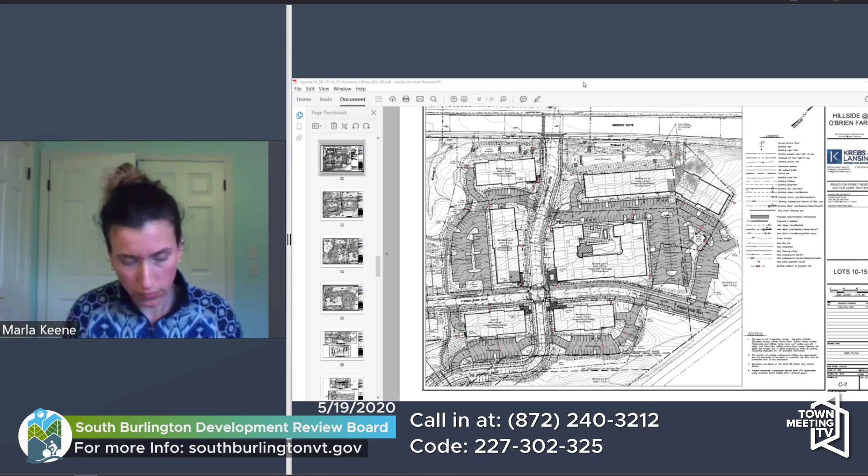Okay, so if we correct that previous graph that dictates what each of the stories are of each building, then it should align with that exhibit, correct? Yes. Andrew?

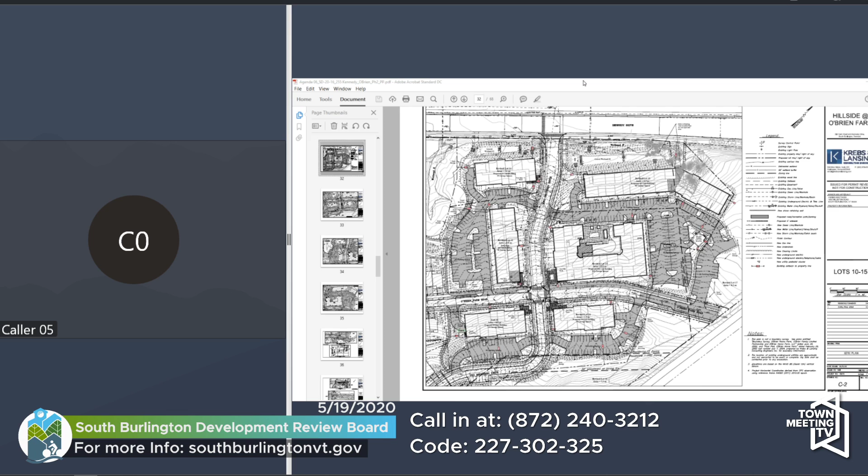Yeah, and I think the issue is that the master plan provided a setback waiver for buildings of 5 stories. And so if these are 5 stories, they would already have a 6-foot, I think, front setback. And so some waivers wouldn't be necessary, depending on which one is the front. It's just a problem that we have to figure out.

So I think that we've got that. I think the question that the board should keep in mind would be to just look at the site plan and, in general, does the way that it's set up seem appropriate? And that would be sort of the feedback that we'd be looking for.

Another reminder of our discussion held 4 years ago regarding the master plan, regarding staff comment number 8. Staff recommends the board review whether the applicant is compensated for the requested height waiver by providing high quality, varied, and complementary architecture for all buildings and landscaping, to determine whether they will preliminarily grant the applicant's request for height waivers. Maximum height is 35 feet for flat roofs.

In the R12 district, the applicant is asking for building heights between 52 and 69 feet above average pre-construction grade. And I do remember this discussion that happened during the master plan, and how this works only if you can build up and not out.

But I also remember us stipulating, Mark, do I have this right, John, that we wanted to make sure we were putting up buildings that were appealing, not just tall buildings. I think that's where this comment comes from, if I recall.

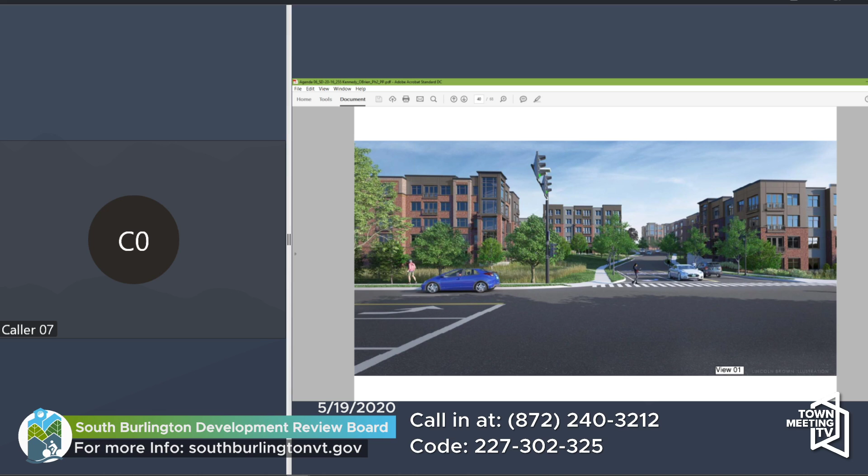We think the flat roofs actually work well here, considering its location. It's a prominent building on a fairly heavily trafficked commuter thoroughfare, so it's a little different than if it were tucked back into trees in a more suburban setting. These are also bigger buildings than Lancaster or Stonington Circle, so you're trying to find that appropriate mix. Thank you, Evan. No problem.

Okay, moving on to staff comment number 9. This is talking about inclusionary -- Paul's not on, but Marla or Delilah can correct me. As I'm learning, we've got an inclusionary housing ordinance that's pending. It's been warned and will likely be adopted, but it's not officially adopted yet. The city council, I believe, extended or continued it last night.

But we have an inclusionary housing ordinance that will likely be adopted, that this project is attempting to comply with, with the goal of providing more affordable housing for the city of South Burlington. So that's the short background. Sandy or John with the Affordable Housing Committee could give a lot better explanation than I can, but that's the background for staff comment number 9.

Staff recommends the board require the applicant to provide 3 additional inclusionary units. If the applicant adds 3 inclusionary units, they may add up to 51 offset units, which would make their proposed 390 units allowable without amending the master plan. There's a lot of math here in the preceding paragraph. First, ask the applicant: do you agree with the staff's math here?

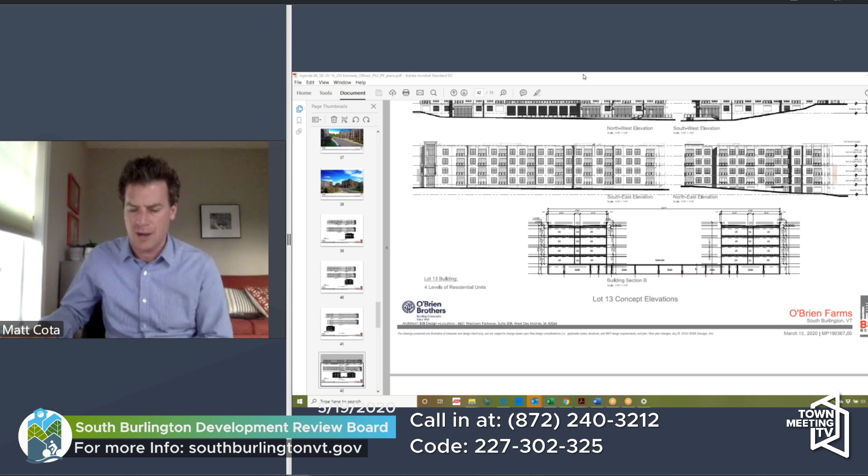Staff comment number 12: the applicant has received preliminary water allocation and has provided an estimate of wastewater flows. Staff recommends the board require the applicant to apply for and obtain preliminary wastewater allocation prior to applying for final plat. Is that agreed, understood? That's no problem. Yep, okay.

Staff comment number 13: staff recommends the board require the applicant to incorporate the comments of South Burlington Water Department into their plans at final plat. I can speak to that, this is Scott Homsted. Typically what I would do is, after this meeting, set up a meeting with South Burlington Water District and basically do exactly what they want. These comments are easy and much easier to hash out in a 15-minute meeting than to do a lot of back and forth. I'm not concerned about it at all. Okay, thank you for that, Scott.

Staff comment number 14 regarding circulation. Since phase 2 trips are now projected to be so much lower than estimated in 2016, staff recommends the board require the applicant to evaluate whether the proposed intersection geometry is still important. Maybe a brief discussion on why we're expecting fewer trips, Marla or Evan, whoever.

Yeah, the change there I think is driven by the fact that in the original master plan we had included the full amount of residential density units as well as up to 45,000 square feet of commercial, because at that point we weren't fully locked in to a fleshed-out plan. With that 45,000 square feet of commercial, it drove those trip ends up. So Marla and staff are correct that the trip ends are reduced fairly significantly. When our engineer takes a look, my assumption is there's probably not going to be a big change to that intersection onto Kennedy as a result, but we'll certainly take a look at it.

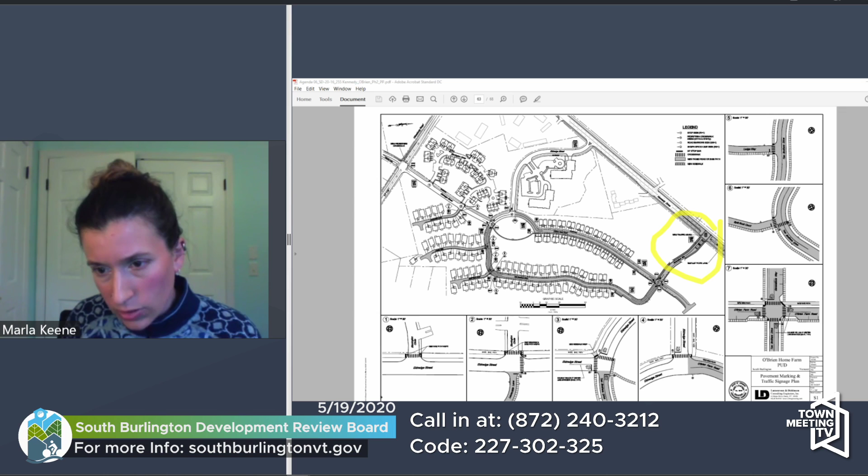Anyone can draw on this if they want to point something out. So we're looking down here, I'm going to try and circle it. This project has proposed an additional turn lane on Kennedy Drive, and then coming out from the project, a left and a right onto Kennedy Drive. So the question is, now that they've reduced the trips by almost half, is this geometry still the proposed geometry, or is something smaller more appropriate?

And you're welcome to, anyone can zoom in on what we're seeing on the screen as well. I'm sorry, this is Dawn, I stepped out to close some windows because it's getting chilly outside.

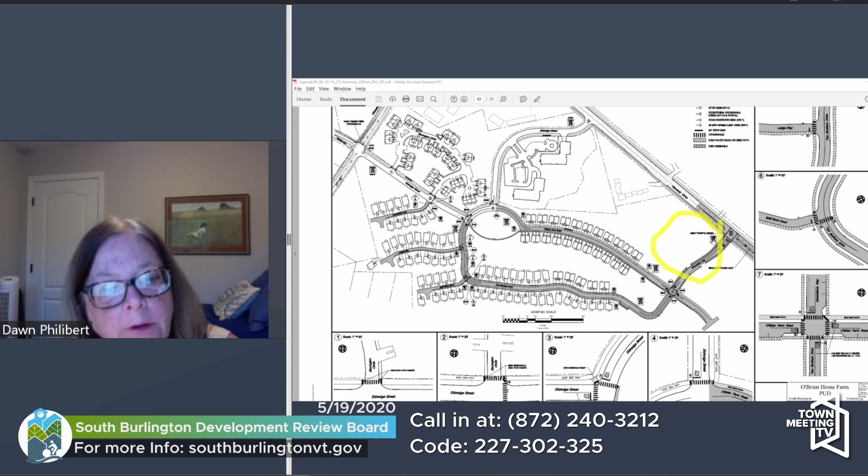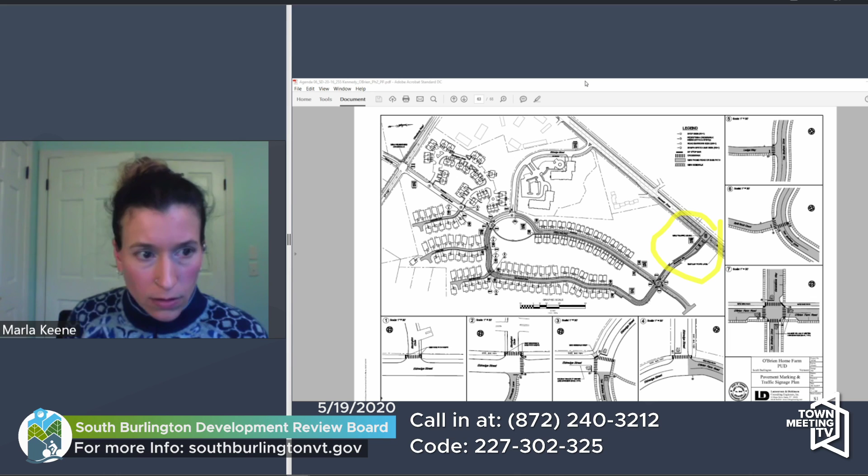Why do we have a theory on why the trips have been reduced? The trips have been reduced because the previous trip estimate included a large amount of commercial square footage, which is no longer proposed. And correct me if I'm wrong, Evan and Andrew, but at Sketch you said you weren't going to be doing that commercial. That's correct, there's no commercial. Once we increased the unit count, it took the space previously assigned to the commercial use. Right, so residential units generate significantly fewer trips than commercial space. Thank you for that explanation.

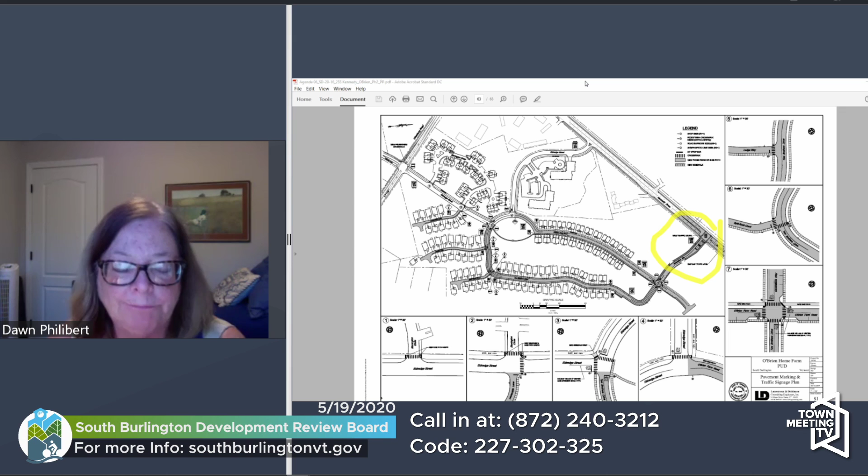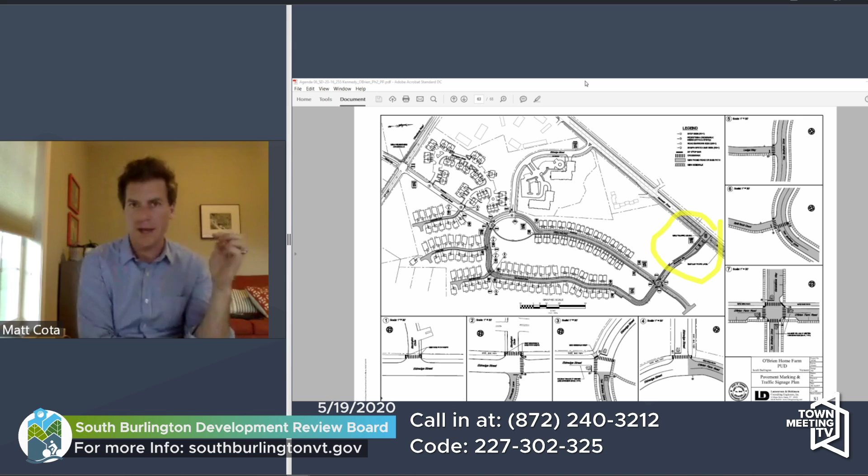Okay. I'm not a road engineer so I don't know if we still need it, but my inclination is to say... So we'll look at that with our traffic engineer who did the original study and get a recommendation, also keeping in mind the context of the plan we're pursuing on the other end of the site and the future potential of the intersection. I'll get a letter or some memo from him, hopefully prior to the next meeting on the 16th or 19th, whatever the day was.

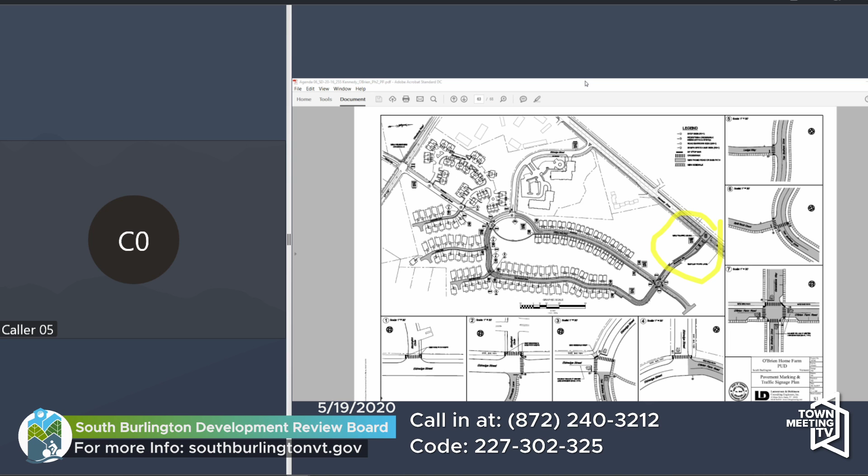Okay, thank you Andrew. Item number 15: at this more formal stage of review, staff recommends the board require the applicant to remove the head-in parking. This is on Two Brothers Drive, and if the applicant desires, replace it with parallel parking spaces. I'm zooming in here on Marla's map.

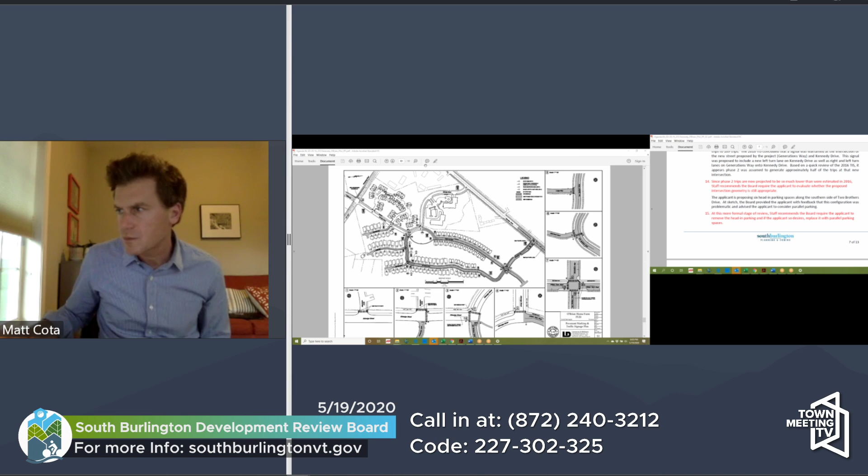Can someone circle where we're talking about? Delilah, can you go to a plan that shows the project? Are you in the plans PDF or in the overall? I can help you find the right page if you tell me which PDF you're in. She's in the overall.

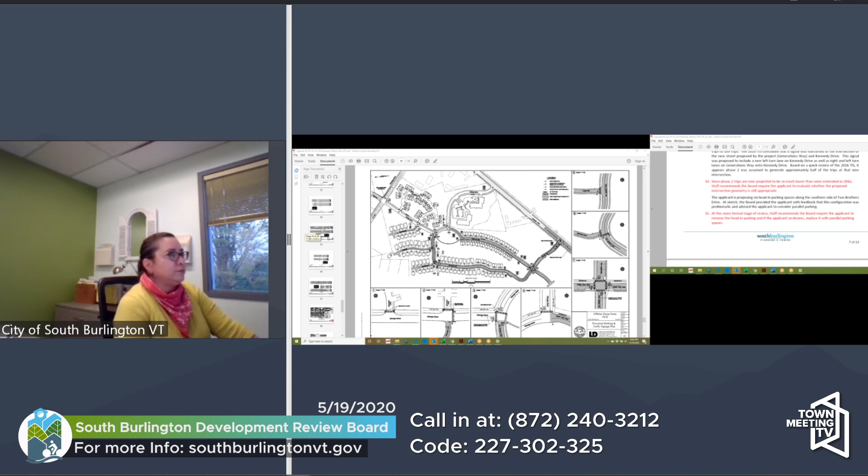Which page would have what you need, Marla? I've got them both open now. Can you see both my screens? No, but it's okay. Are you in the one with the staff comments and the plans, or just the plans? I'm in the one with staff comments and plans, with staff comments on the left and plans on the right. Okay, so go to plan page 31.

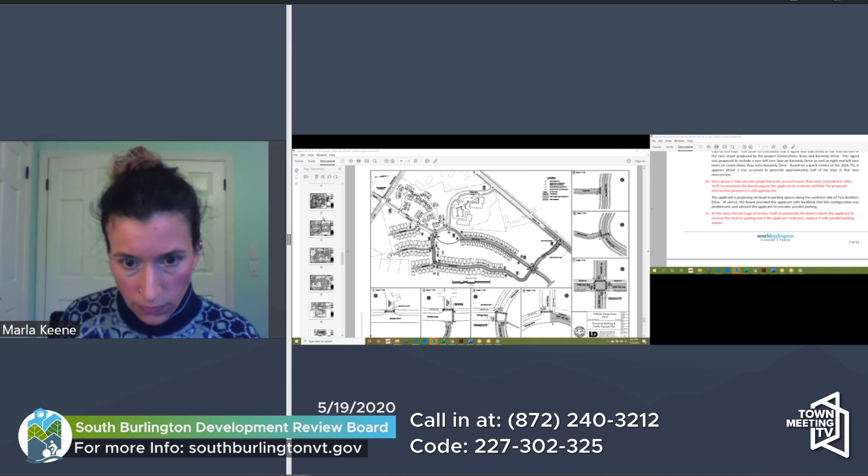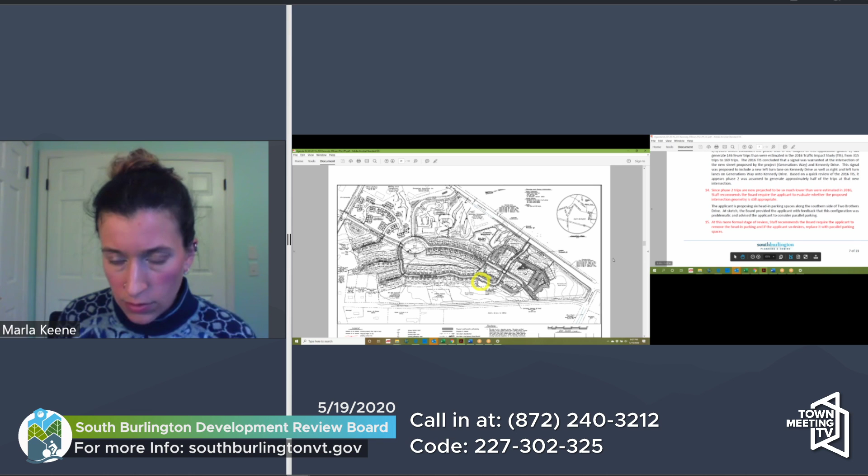So these guys, you want to zoom into those? I'll zoom into there, hold on. It's going to move your drawing, but I'll erase that.

So with regard to those parking spaces, our understanding is those spaces are fully approved in the existing Hillside final plat. They're currently soon to be under construction, as that section of road is likely under construction this year. When we had our sketch plan hearing a while ago, we had put a club building at the top of the hill, right above lot 10 and lot 11, and had increased that 6 spaces to become like 17 spaces. The spaces rounded the corner, and there was concern that it was a safety hazard and didn't work with the grading. There were all kinds of problems. All of those additional spaces have been removed.

So I'm just to the 6 spaces I believe are part of the current plan. I'm not sure that this permit proceeding will be done in time to change those, and they're probably going to be built this summer, so I'm not sure there's much we can do on these.

Is that right, Marla? Are those parking spaces part of a previously approved plan? Not that I'm aware of, but I'm not calling Kevin or Andrew a liar. I'm just saying it's not something I had been made aware of before. A lot of this project proceeded before my time. That may be the case.

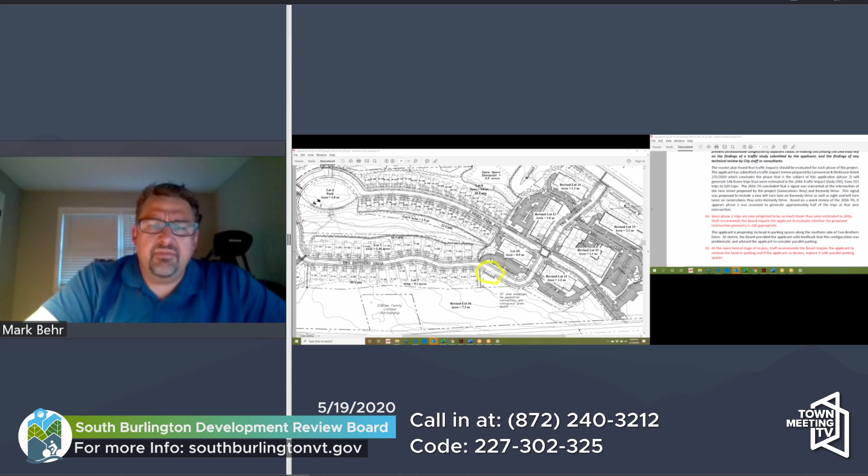Correct. So when we had our sketch plan hearing for this preliminary plat for these 6 commercial lots, we were looking at expanding the master plan to put the clubhouse at the top of the hill. We've since pulled that aspect of the project out after the sketch plan. So the spaces have always been there, they're part of the Hillside final plat.

The conversation with the board was, what if somebody who lives at lot 771 has a small gathering and has extra people, where do their guests park? Guest parking predominantly is along Eldridge Street in this neighborhood. There's 100 spots on Eldridge Street, but we wanted a few spots nearer to the folks on the far end of Two Brothers Drive, so that if they had a couple extra cars, they weren't double parked in the road. That's where those 6 spaces came from and why they're in the plan. We had expanded it when we were looking to put a club up there, but we've since pulled that back, and the spaces shown, I believe, are just existing approved spaces.

Is the concern, Marla, that the cars will be backing out, a safety aspect, or that we just don't need that much space or parking? Purely safety. We generally don't have head-in parking on roads. Yeah, you're going to back out there, and I don't know what the speed limit is, 15 miles an hour.

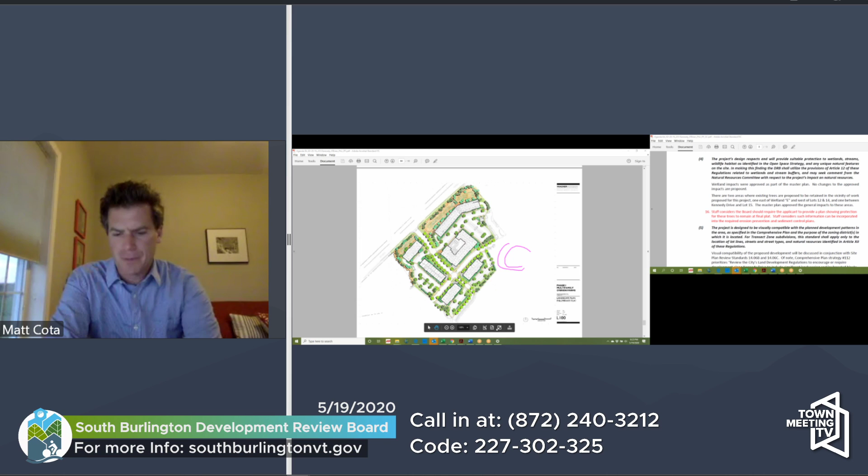Yeah, Matt, can I just make one comment? I think this is an important issue, especially with this plan on the screen, because you're looking at 4 to 5 story apartment buildings, and there's not a lot of green space. It's basically parking lot, then the islands for the parking lot and street trees. I don't see a lot of opportunity for little pocket parks and benches and any kind of recreation space.

I know we're talking about the stormwater area between the development and Kennedy Drive, but I think we need to see how that's actually going to be utilized as a public usage space.

Okay, thanks, Mark. I think if there's no other comments about green space and open space... This is Dawn, I have a comment. Yes, please, Dawn. Did you, Andrew and Evan, did you develop Lancaster?

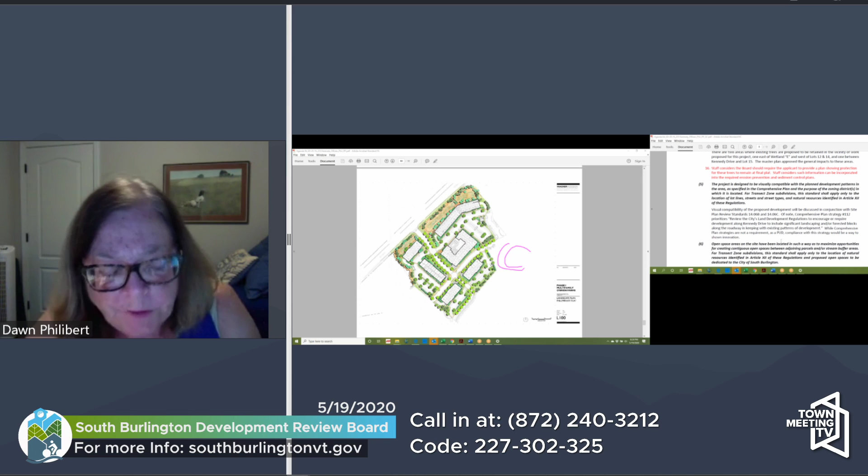Was that an O'Brien property? It was an O'Brien property to begin with, that was permitted and then sold to another builder.

Because I drive by it all the time, and there's a lot of trees, and benches scattered, and I'm stunned by how occupied those benches are. At one point I thought they might be blow-up dummies, like you see in the city in the express lanes or something, because there are always people sitting, and then other people bring their chairs around, and I think that's wonderful. So if there's any way of incorporating that kind of concept, I think that would be great.

Thank you, Dawn. Yeah, no, I think we like that idea. I think we can fit some things in, and I think we will, and we'll show you guys where they're going. And I think, Matt, to your point, it is an adjacent master plan that has that open space, but this master plan that was approved with these lots also has significant open space that's not on the screen currently. So perhaps getting some perspective in terms of the whole development and the open spaces that are available.

As Evan mentioned, there's a large open space immediately down the page of the three buildings. Mark, I don't know if you were misunderstanding what I was referring to, but I wasn't referring to the space in between building or lot 15 and Kennedy. It's that large area to the south that's right now just shown as white.

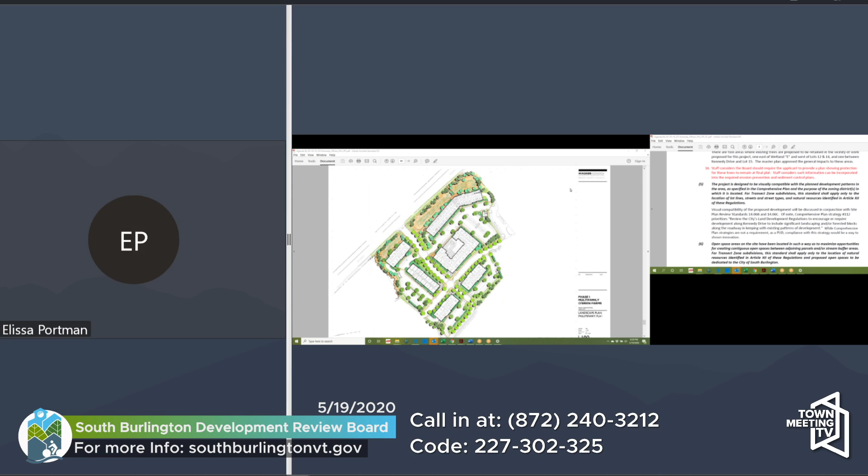So with that, I move that we continue SD 2016 to July 7th. Second, seconded by Dawn. Roll call: Brian Sullivan, aye. Dawn Philibert, aye. Jim Langdon, aye. John Wilking, aye. Elissa Portman, aye. Mark Behr, aye. Matt Cota votes aye. This meeting is continued to July 7th. Thank you very much for those attending.

We'll now go to agenda item number 7. Is this ours as well? Don't go too far, Evan.

Agenda item number 7, continued master plan application MP 2001 of O'Brien Farm Road LLC to amend a previously approved master plan for a planned unit development to develop 39.16 acres with a maximum of 458 dwelling units and 45,000 square feet of office space. The amendment adds 0.6 acres to Zone 2A without changing the approvals or use for that zone, and removes 0.6 acres from Zone 7 at 255 Kennedy Drive.

Who is here for the applicant? Evan Langfeld. Andrew Gill. Evan, welcome back. Now, we continue this item from April 7th.

We didn't have any further questions. The applicant requested we continue this item to this hearing so that no amendment would be made prior to the initial review of SD 2016, the related preliminary plat application. Staff recommends the board ask the applicant whether they are comfortable closing this hearing, incorporating that feedback into their determination of whether to close this item at this time. So where are you guys at with this?

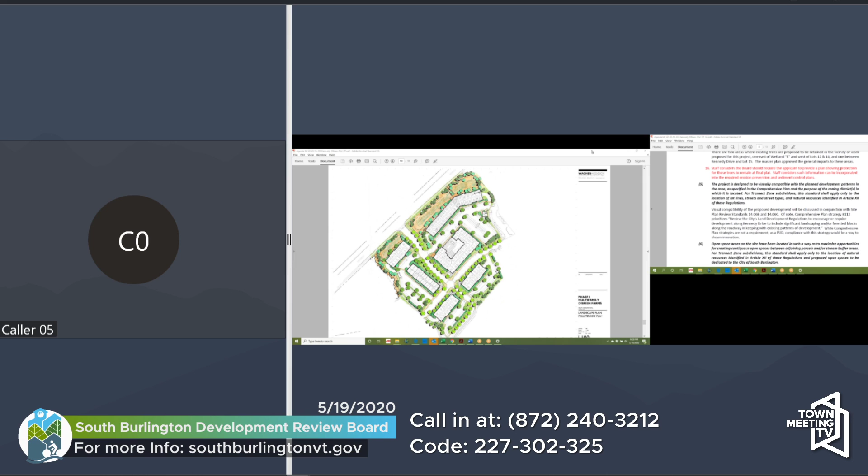I think that we would like to just continue this right along with the preliminary plat, if that works for you all. Okay, it'll create a little bit of a complication with the future phases, and it should just sort of progress simultaneously, if that works. All right, with that, I move that we continue MP 2001 of O'Brien Farm Road LLC to July 7th.

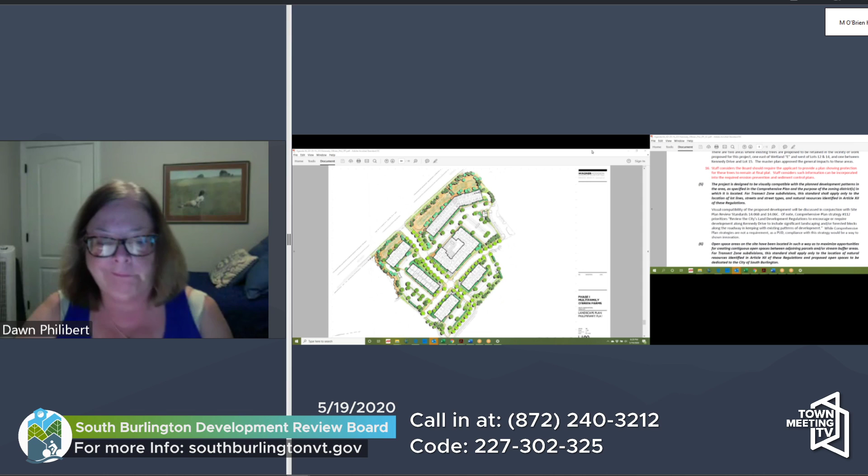Do I have a second? Second, John. Seconded by John Wilking. Roll call: Brian Sullivan, aye. Dawn Philibert, aye. Jim Langdon, aye. John Wilking, aye. Elissa Portman, aye. Mark Behr, aye. Matt Cota, chair, votes aye, and this item is continued until July 7th. Evan and Andrew, thank you very much. Have a good night.

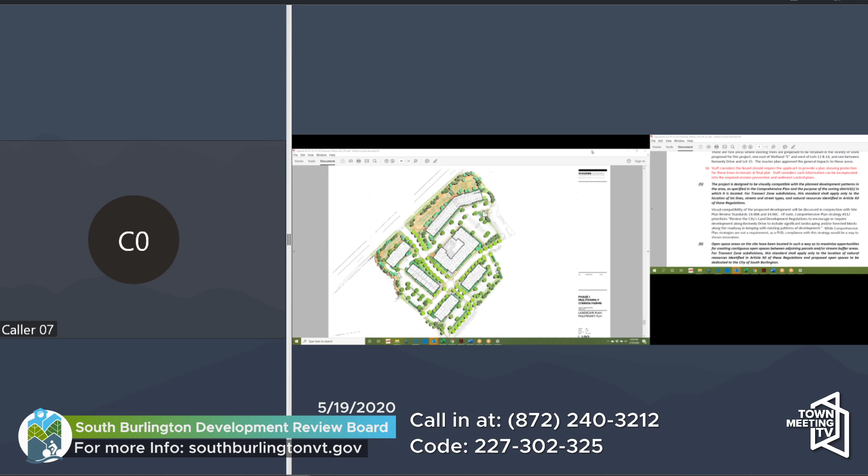We're going to open up the next three agenda items concurrently, if that is okay with staff and the applicant. We're going to open agenda item 8, 9, and 10: site plan application SP 20-020, site plan application SP 20-021, and miscellaneous application MS 20-03.

Who is here for the applicant? Hi, it's Robin Jeffers here for the applicant from SD Ireland and South Village Communities, and with me are Patrick O'Brien and Dave Marshall. So we got Dave and Patrick.

Great, and this is a site plan application, so I'd ask all three of you to raise your right hand and swear to tell the truth under penalty of perjury. I do, I do. Thank you. Robin, Patrick, David, I don't know who wants to take the lead, but here we are again. Tell us a little bit about why we're back here with this project and a little bit about the history, whoever would like to give a short synopsis.

We are back here with two lots, 4A and 4B, on Aiken Street. As you enter the development, coming up Allen Road East from Spear Street, you would take your immediate right. There are three houses, and then two vacant lots. This is actually our third time coming in for these lots for relatively the same buildings. We had a hard time during the recession financing these buildings, so our previous approvals ran out. Now we have more favorable lending and buying conditions, so we're back to get these reapproved. The last approval we gave to this was when? Was that in 2018, 2019?

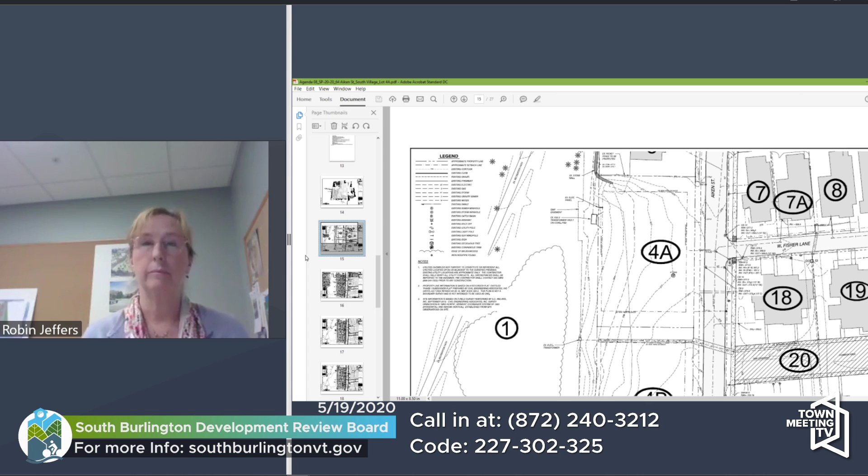So Robin? Yes, I think it would be helpful to send that to Marla, but also to the Planning Commission, because that's an important statement. I'm not sure what ability we have to waive that requirement based on Efficiency Vermont's recommendations if it's written into the LDRs, but please send that to Jessica or Mike Bittag at the Planning Commission as well.

We did send it to Marla, so she does have it. We also read that the statute says 'should' and not 'shall,' meaning you may allow the 22%. So we are requesting that.

Any board comment on having less glazing? Yeah, Matt, I can speak to that in detail. The 30% is a 'should,' not a 'shall,' and as a board, in past projects we've treated it as guidance, not a requirement. So if they're proposing 22%, there's really nothing saying we have to enforce the higher number. We've had discussions on at least one or two projects specifically about how it flies in the face of energy efficiency and Efficiency Vermont's standards regarding too many windows. Sometimes it's contradictory.

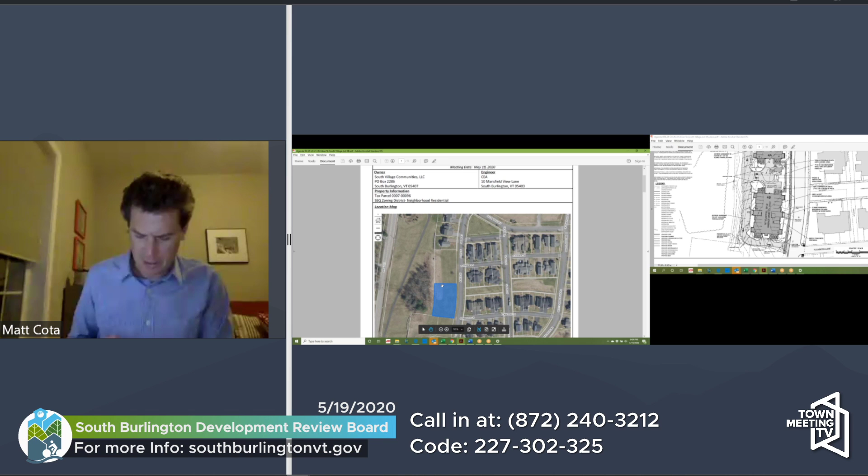With regard to the building just to the south of us here. Yes. A lot of the questions have already been answered, but I want to just review staff comments to make sure we've got coverage. Again, number one, dealing with coverage, same question as before, and I assume it's the same answer regarding 35%. Yep. Number two, since this project required a master plan to obtain individual site plan approval, staff assumes no water allocation was obtained. You will get that as a condition of approval.

And number three, staff recommends the board require the applicant to calculate how much translucent... We talked about that. Yes, that's fine. And then our landscaping math, which you are going to adjust for this project as you did for the other one, I assume, correct? Yes. Okay.

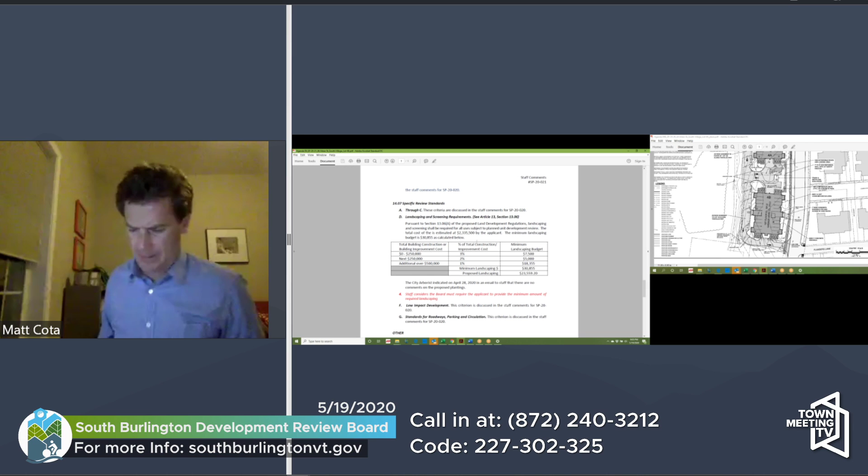We also opened up number 10, South Village Communities miscellaneous application.

Have you read the draft decision regarding the miscellaneous application MS 2003, Robin? We have read it and we accept it. Okay, you have any questions about it? No. Okay, thank you for that.

Are there any other questions from the board regarding this? Question. Go ahead, John. This is John.

So I read the comments that the neighbors and abutters submitted, and it sounded like they were surprised about the height of these buildings or the stories of these buildings. And I was thinking, well, maybe they're saying they wouldn't have bought their property if they thought the buildings were going to be this high. I don't understand it. So could you give me your interpretation of what their concerns are? And then I'd love to hear Marla's comments. Thank you.

Sure. We actually prepared a response to the Foster's letter. With your permission, I'll just read it. It's not terribly long. Go ahead. We are writing in response to the letter submitted by Brian Foster and the other signers. Skipping right to the key points, misled by developers, traffic safety, and the 3-story height.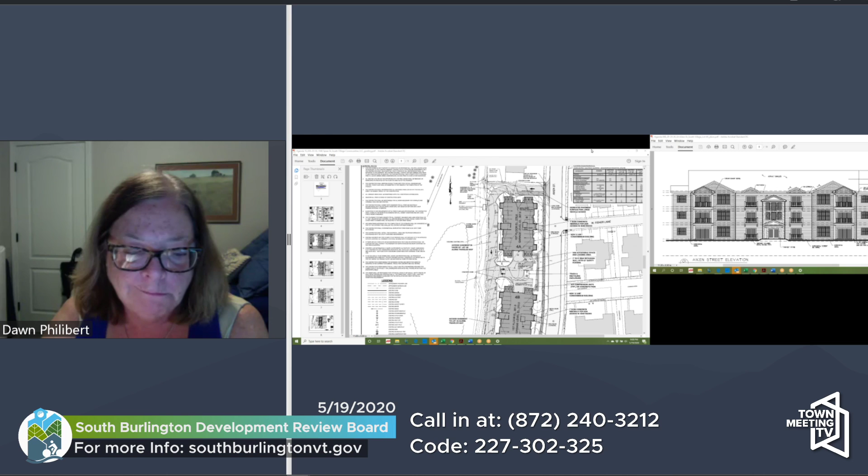I'm happy to forward the letter. Robin, did you submit your written response as part of that supplemental package you sent on Friday? I did not, we only prepared that today and didn't think I could send it today, but I can certainly send it. That'd be great. You've read it now, so it'd be great if the board could have it to read again at their leisure.

Sure. So before I ask the board, staff, or the applicant for any other comments, I will invite the public to comment. But I'll also say that we are going to continue this hearing because there's a couple of things we need before this ends, so this is not the last opportunity to comment if you've been listening. There's always an opportunity to write in the chat box, submit an email to Marla, and there'll be an additional opportunity to comment when this meeting is continued.

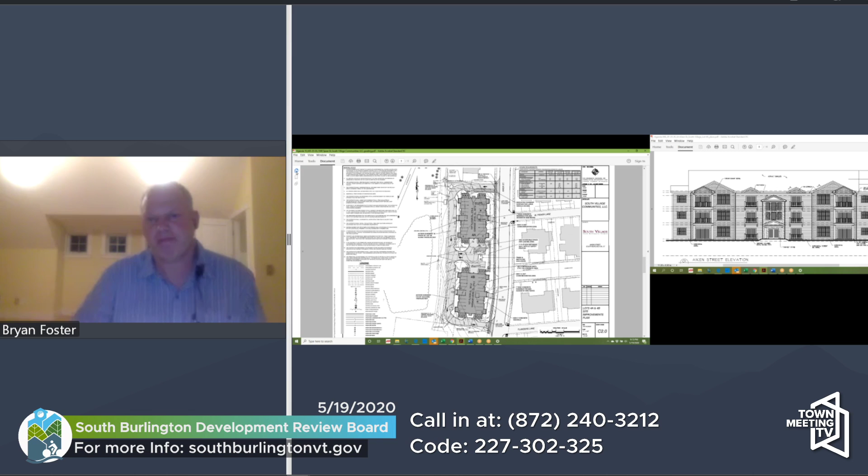May I comment? This is Robin. Those two lots, lot 5 and 5A, are single family. So there will be a single home on each one of the lots. There will not be any larger units. Thank you for that, Robin.

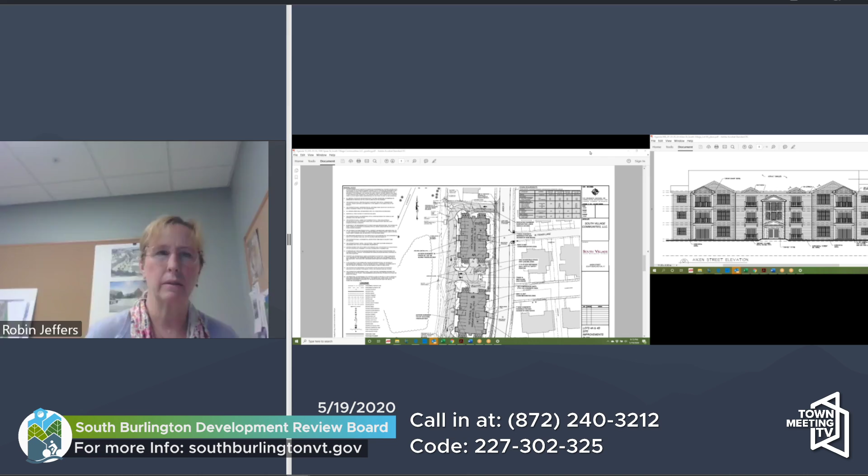If we zoom in... okay, all right, I see that. That helps, because we certainly don't want street parking, which there's already some issues about in the community. I don't know how many spaces there are, I do see the little division lines, but it's something. Okay, thank you, Brenda, and thank you, Robin, for that response.

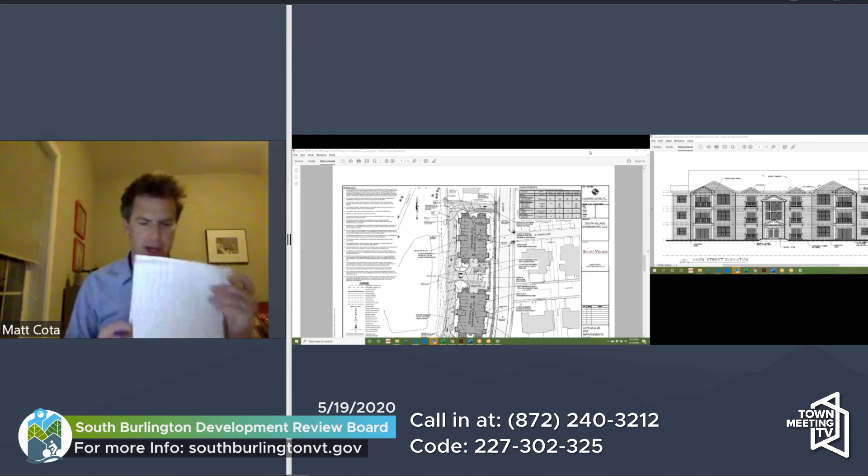If there's not, is there any other questions or comments? I would move - well, we've got a couple decisions to make. One is item number 10, miscellaneous application MS 2003, which we can close, and then item 8 and 9, which will continue to June 16th. Is that right, Marla? Do I have that correct?

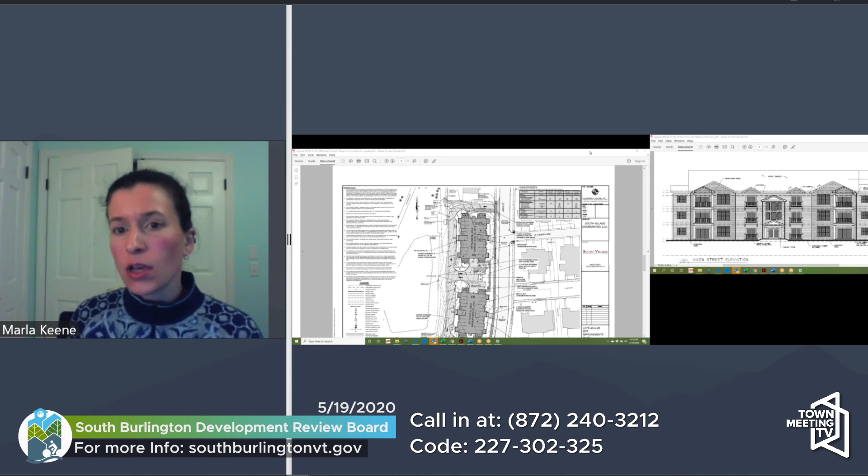Right, so similar to what we saw for O'Brien, this may be one of those situations where the board may want to just keep MS 2003 open until such time as the 2 Aiken Street applications are closed, because you don't want South Village to have to undo the miscellaneous if these 2 don't go forward. Though it's ready to go if you wanted to go that way. Fine with you, Robin? Yes.

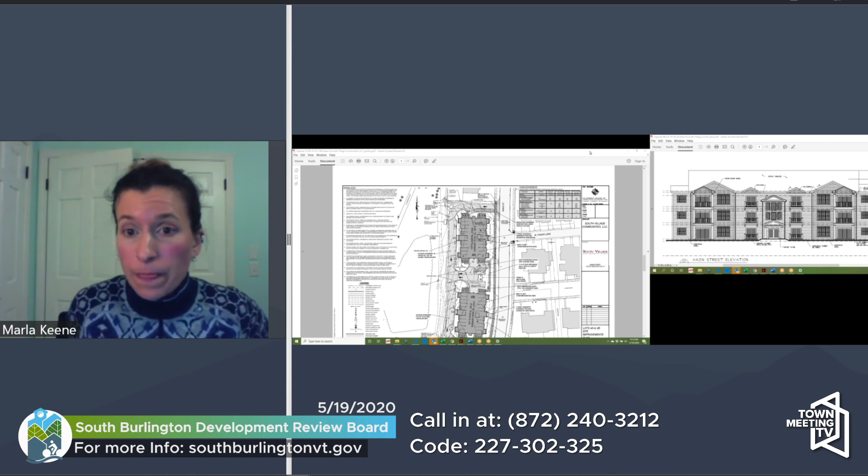Okay, so I move that we continue site plan application SB 2020, site plan application SB 2021, and miscellaneous application MS 2003, all three till June 16th. Do I have a second? I'll second. Seconded by Dawn. Okay, roll call.

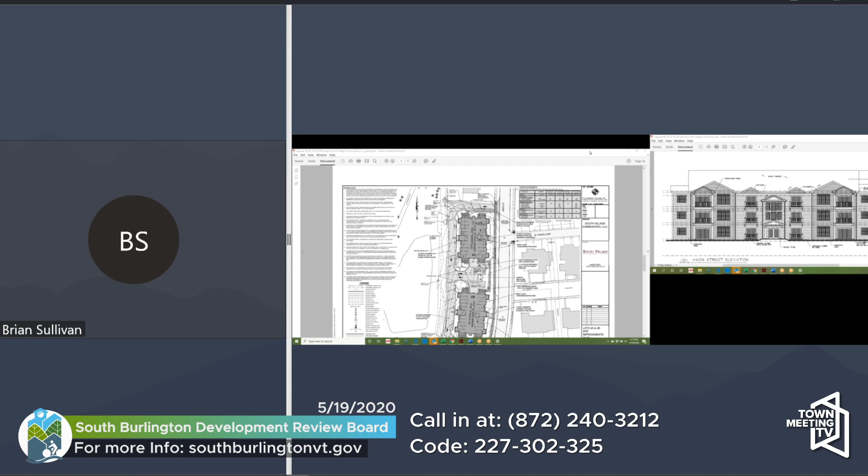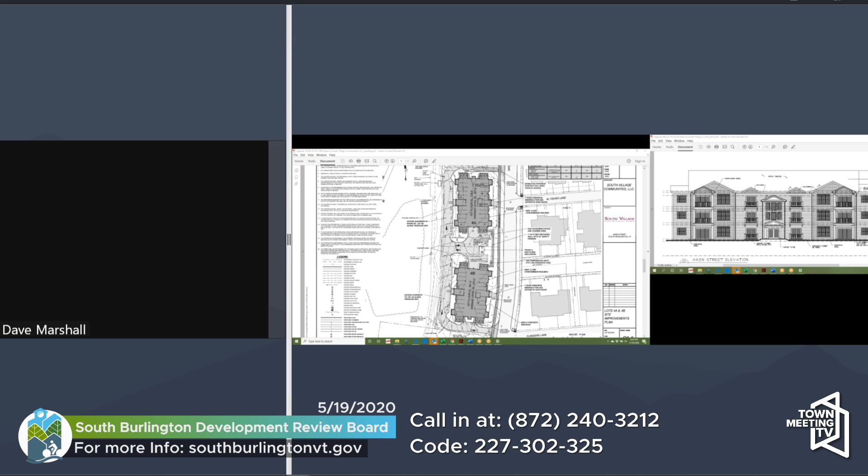Dave Marshall from Civil Engineering Associates. Hi, Dave, how are you? Doing well, thank you. Anyone else with you? We will have Jennifer Morway that will be monitoring our discussions tonight. Okay, it's sketch plan, so we don't need to swear you or anyone else in.

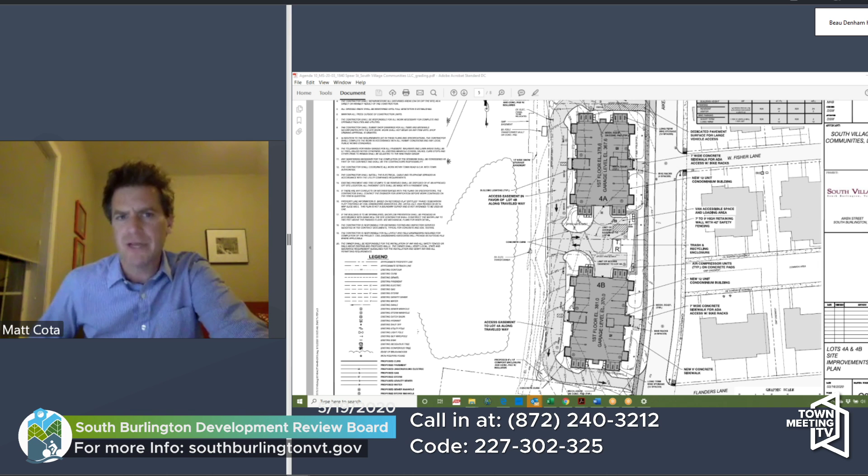Just want to remind the public that this is sketch plan, a high-level review and discussion where an applicant receives feedback from the board on major elements of the project before it is fully designed. During this meeting, the board may provide oral guidance to the applicant, which does not constitute the board's determination that the application meets the purposes of the land development regulations, but these comments are meant to help guide the applicant to a later application that meets the full LDR requirements and contributes to the goals of the comprehensive plan.

This is not a formal hearing. There will be no vote. It does not result in a binding decision. There's no swearing in. The board may choose to continue the hearing at a later date if there are questions that remain to be examined, and a future date will be announced prior to concluding this item.

Upon conclusion of the sketch plan meeting, an applicant who wishes to move forward with their project will have to submit a complete application, and the next level of review includes additional public notices and a formal public hearing.

Okay, so sketch plan. Tell us a little bit about what's proposed here, David.

Mr. Marshall? Sorry, muted. There you go. Again, for the record, Dave Marshall from Civil Engineering Associates. Marla or Delilah, I didn't know if you could bring up sheet C 1.0 or 1.1. That represents an existing condition plan that will help all of us orient ourselves with regard to what the existing 15-acre property looks like and its location. And out of all that, we can then work through the staff notes in support of that. I'm working on it. Hold on a second.

This plan. Marla, is B the plan? I have 2 items open and they're both this draft. 11B. Why don't you go into the regular one, just 11 in the regular packet? Oh, sorry, and I think that would be. Are you? Yeah, you're in the right. No, I brought up the wrong. Sorry. And it looks like you've paused your sharing because we're still looking at the minutes. Yeah, just do that. Let me just bring up what I have because. Okay. Oh,

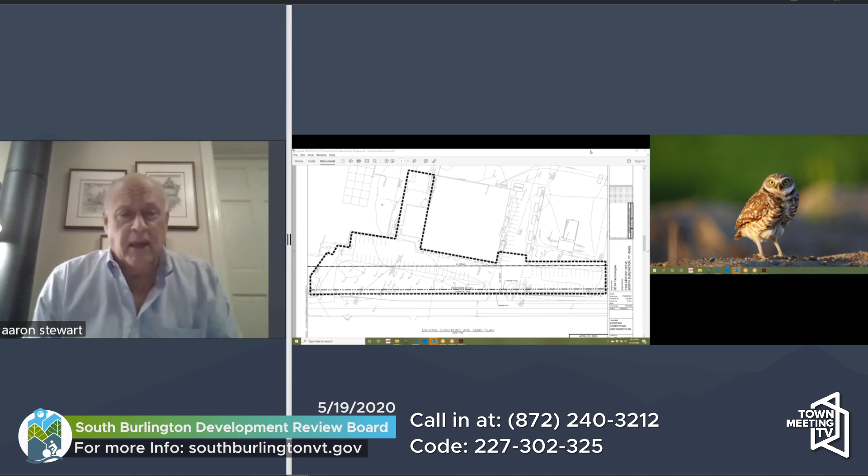I wanted to take a moment and bring back to the board's thought process why we came up with a very specific and unique design for the parking lot. The existing parking lot as it is, there are currently 85 parking spaces in this area, and we are bound and determined, 85 parking spaces, and we were bound and determined to try to figure out a really unique and interesting way to present the front of this building.

So I just wanted you to take a second and look at this existing situation. There are 85 parking spaces in the front of the building, either in front of the building, along the southwest side, or directly along the south of the building. And there are 39 spaces in front of the building, and 19 spaces that sit in the setback in front of the building. So those are some numbers to keep in mind that we will come back to in a moment.

Delilah, if you could go to the secondary attachment that I sent today, the very first piece of information in there is the submission we made 2 weeks ago that showed a color submission with the curved parking. I just wanted to go back to this for a second before we leave it completely and talk about these other alternates. Marla, is that in supplemental?

Because I'm in pieces and I have these two things. Yep, you want to be in supplemental. And I've compiled all of the 5 pages that Don sent today into one PDF.

If you keep going, there'll be a color one. Maybe the next, there we go. This is what we submitted last week.

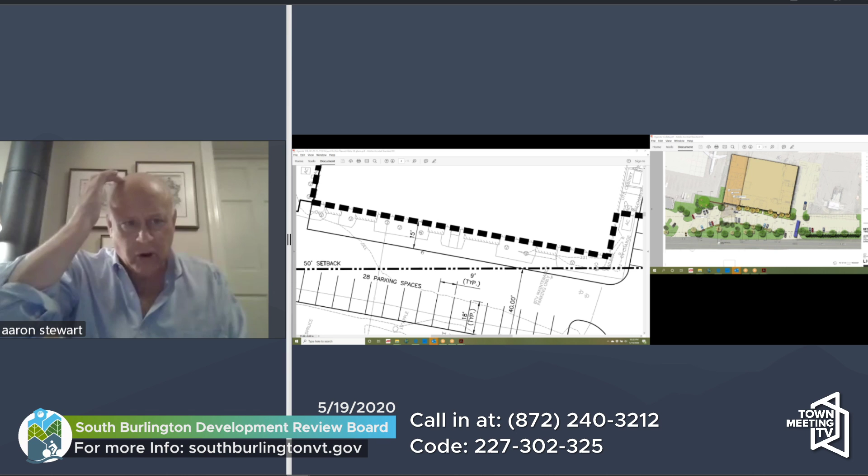It has the 50-foot setback. And if you could enlarge that, please. So we're not even going to discuss the lot over to the right because it isn't really pertinent. But what I'd like to note here is that in the original submission, we came up with, as I mentioned before, there were a total of 85 parking spots. Excuse me, in the existing is 85 parking spots. In that submission you looked at, you're looking at on the right, there are 83.

In the 15-foot drive offset, there are 87, and in the 10-foot drive offset, there are a total of 93 parking spaces. So the existing building right now has 39 spaces in front of it. The original submission we showed you on the right has 37. In the 15-foot drive offset, there are 42 spaces in front of the building, and in the 10-foot drive, there are 39 spaces. So from existing, we go down to the original submission and then up a little bit for the 15-foot offset, but the 10-foot offset has this exact same number of spaces in front of the building. The number of spaces in the setback varies some.

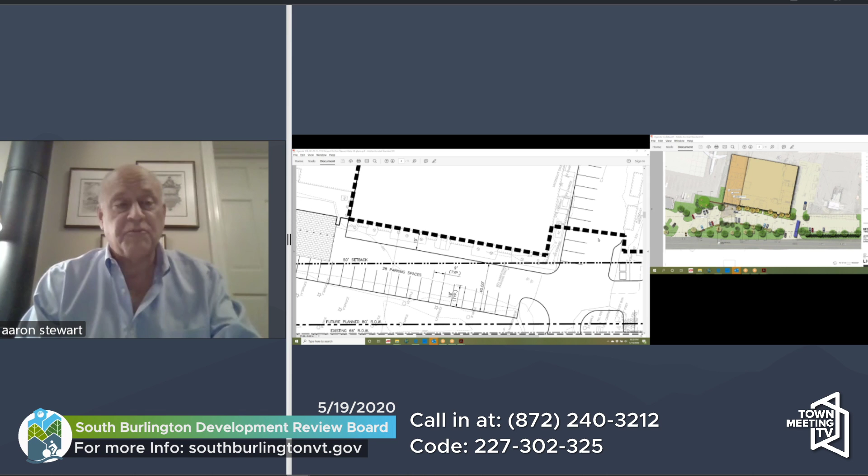So, and if you could move this a little bit to the left, Delilah, if that would be possible. Just a little further, please. Thank you, that's fine. Again, you're noting the 50-foot setback here, and you can see on the far right-hand side, it comes very close to the building. This is with a 15-foot offset, which allows us a much more gracious amount of space in front of the building. It also allows us to plant full-size trees.

And Carolyn's drawing, if you look in the upper right-hand corner there, you'll see that that's basically with about a 15-foot offset space in front of the building. It allows us to plant some full-size trees, some tall grasses, and to properly screen and protect our heating and ventilating equipment. And then if you go back to the drawing on the left, you will see that this is our 15-foot offset. We have a 10-foot offset. This is the 15-foot one.

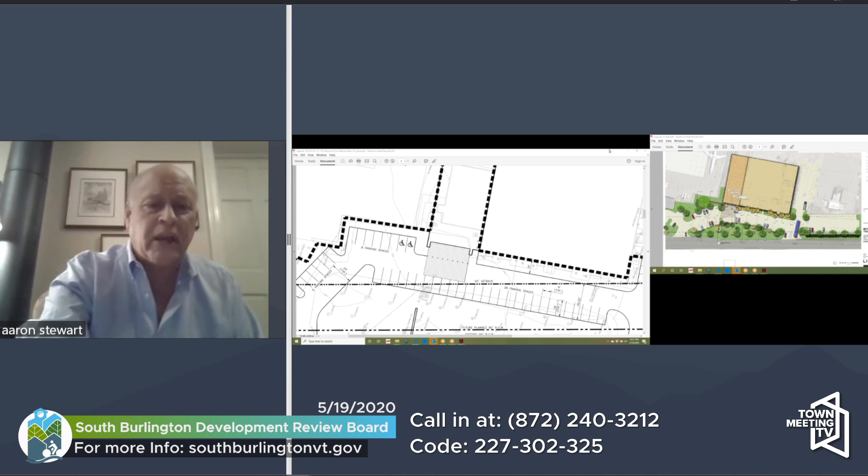You can see that no matter how we orient this parking in front of the building, we are in the setback. The existing is in the setback, the original proposed one is in the setback. The 10-foot or 15-foot offset from the building leaves us with much of this parking in the setback.

Part of the issue that Marla raised, which we can talk about later, is this parking all the way on the left-hand side. So Matt, we came up with two solutions we consider reasonable that reduced the amount of impact on the setback, though they're not dramatically different than what is there now. They're very linear, and I don't find them very creative or a good reflection of what you're capable of doing here. We'd like to do what the board is capable of allowing us to do.

Well, Don, this is sketch, so we're not taking a formal vote here, but you're here to get the sense of the board and their opinions, and I'll state mine. The lot contains one or more existing buildings that are to be reused, and parking needs cannot be accommodated to the rear and sides of the existing buildings. Check - there are planes behind the buildings.

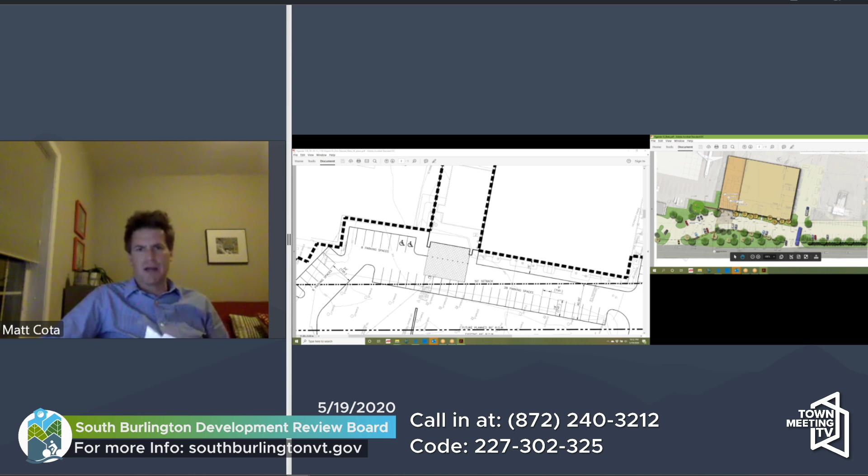Now, what it says is if one or more of these criteria are met, the board shall approve only the minimum necessary to overcome the conditions. So we're talking about a number, and I think there are different ideas on what that number is. When we look at staff comment number 1, staff recommends the board provide feedback to the applicant that either of these configurations, excepting the 6 spaces to the north, would be acceptable.

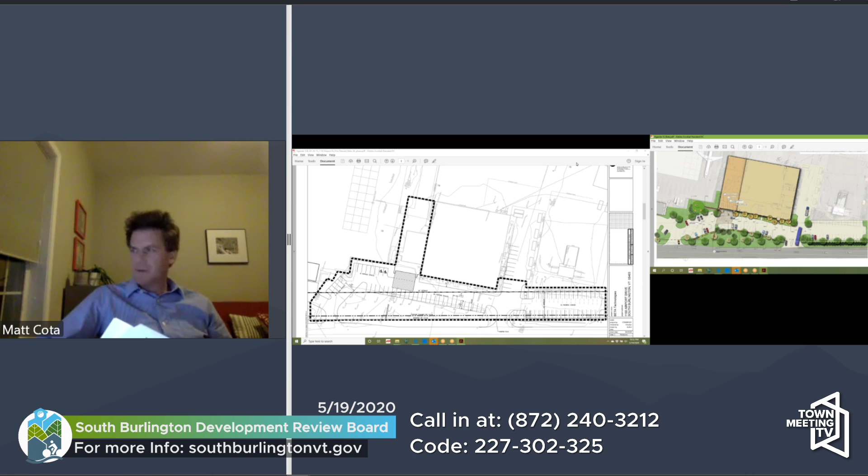So let's highlight the 6 spaces one more time, could we? Six spaces to the north - these are the six which expand the nonconformity. So those are those right there.

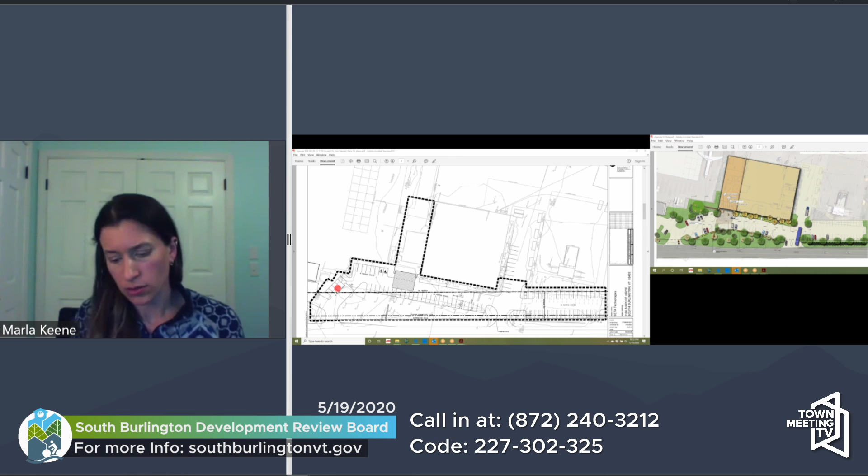Well, except that from my understanding, if they're not in a setback, they don't expand the nonconformity. I think that needs a little bit of a correction. There's a nonconformity here - the nonconformity is that the parking is between the building and the street. It has nothing to do with the front setback.

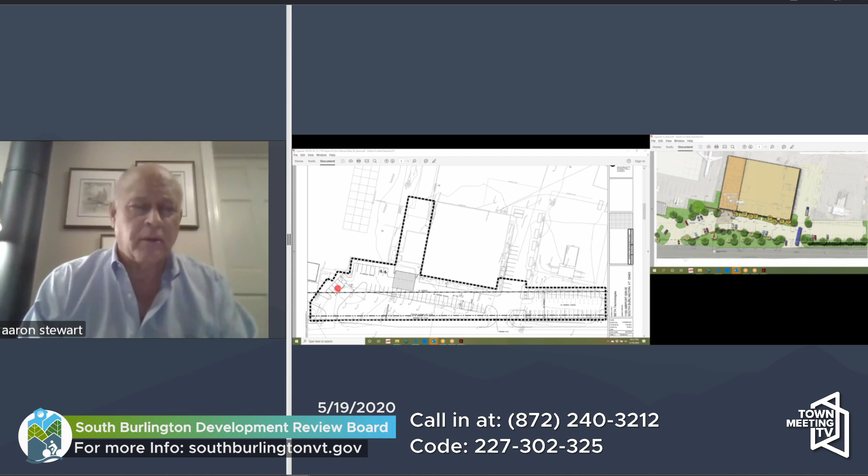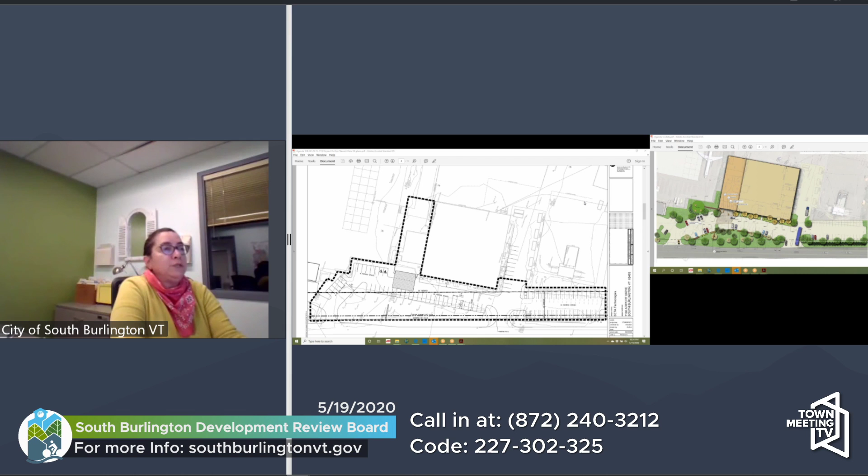So then, by that logic, if we reduce the number of parking spaces in front of the building, we are actually improving the nonconformity, regardless of whether or not they're in the setback. Yeah, is that right? We call that decreasing the amount of nonconformity. So our original plan is the one plan of all of these that actually decreases the number of spaces in front of the building.

Okay, in the staff comments, I think it's probably explicit there: parking shall be located to the rear or sides of a building. It does not say parking spaces - it talks about parking areas throughout 14.06B2. The board has historically interpreted that to be the area of space used for parking, not the number of parking spaces, because it doesn't say parking spaces, it says parking areas throughout 14.06B2.

Is a roadway a parking area? If you were to have a drive aisle with no parking on either side of it, it would not be a parking area. But consider your typical parking layouts - as an engineer, you put on your plan 60-foot wide blocks, 18, 24, 18. That's a parking area.

So my question is very specific: in this situation, is this drive-through area considered part of the parking area? My interpretation would be yes.

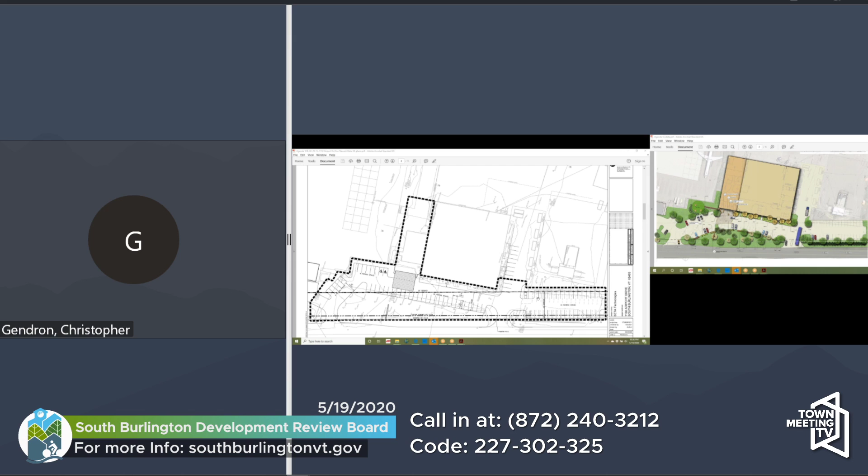So that would be where I would turn to the board. I have a very specific memory of the board denying a request to put pavement in a location where there was not pavement before, even though the total area was reduced, because it was expanding the nonconformity into a location it was not before. That was the interpretation the board made in that situation. I would ask the board whether they would like to diverge from that interpretation in this case, or whether they would like to remain consistent.

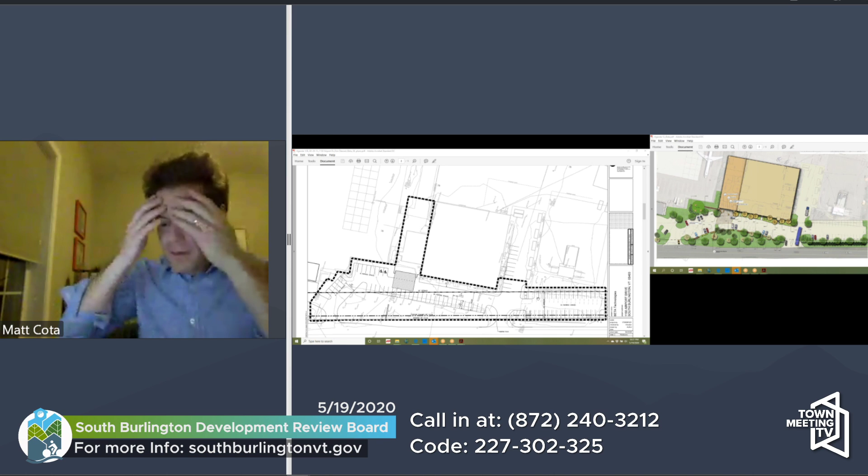Board, do you have any comments? It's John, I'd like to go ahead.

It's John. I think Don's right, the first plan is the most attractive plan. I think there's plenty of good reasons to speak to, in terms of the building and the confines of the space. I understand Marla's concern about expanding a non-conforming use, but I think this plan has reasons to make it happen, so I don't have a problem with it.

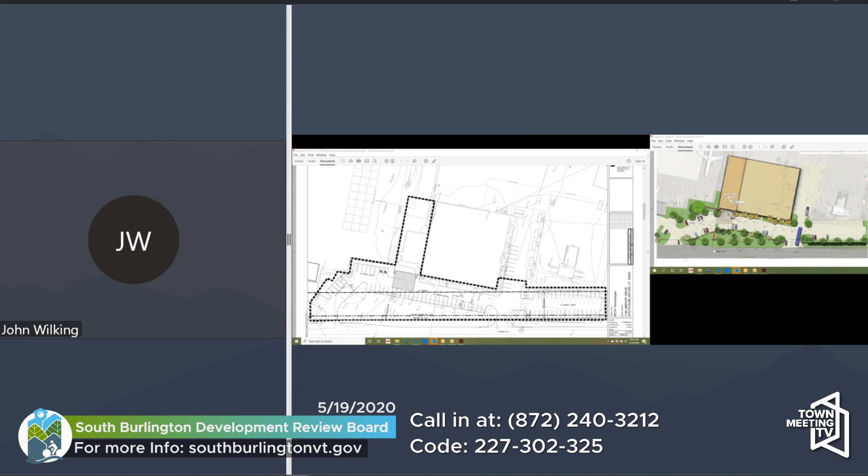This is Brian, I want to agree with John. I was also going to say, channeling Frank Kochman here, just because we did something one time doesn't mean we're bound to do it forever. I honestly don't remember the application Marla was referencing, it may have been before I got on the board, but this particular application shows me why we should exercise the flexibility I believe we can.

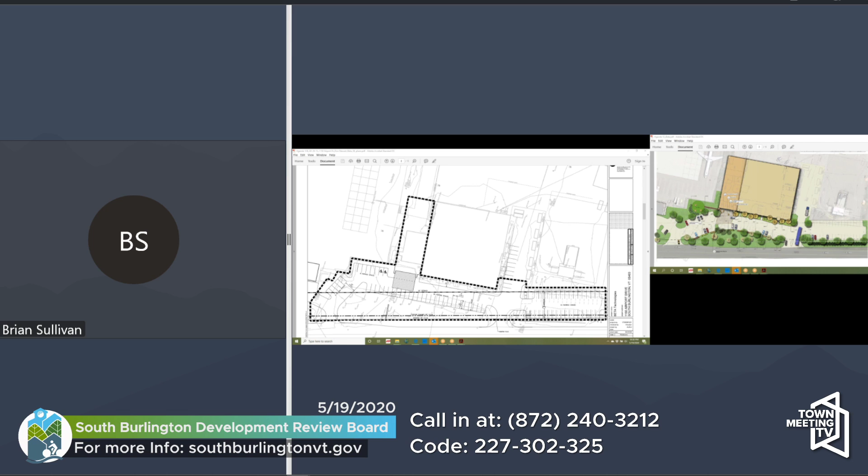Thank you, Brian. Jim, Alyssa, Mark? Matt, I'll offer my comments on this.

Obviously we've had a lot of discussion about parking in the front of buildings and expanding non-conforming use. Without wanting to diverge from what we've done in the past, I really do want to find a way to make this one work, because everything they're doing is improving the aesthetic look of the site.

By keeping the parking the way it was previously configured, you don't get as much green space up against the building, which would continue to soften the aesthetic from the street. Curving the road in brings more green space between the parking and the tarmac behind it, which is going to further soften the site and improve the aesthetics.

I guess one question I would ask, and what I'm looking for is some give and take here: could we lose a few parking spaces in the front to increase some of the green space? Would there be some give and take here? I've looked at it, and I'm wondering if we were to pull the parking in on either the north and south curb cut area by one or two spaces, and maybe directly across from the pavers make that all green, you really would improve and increase the amount of green space from the street.

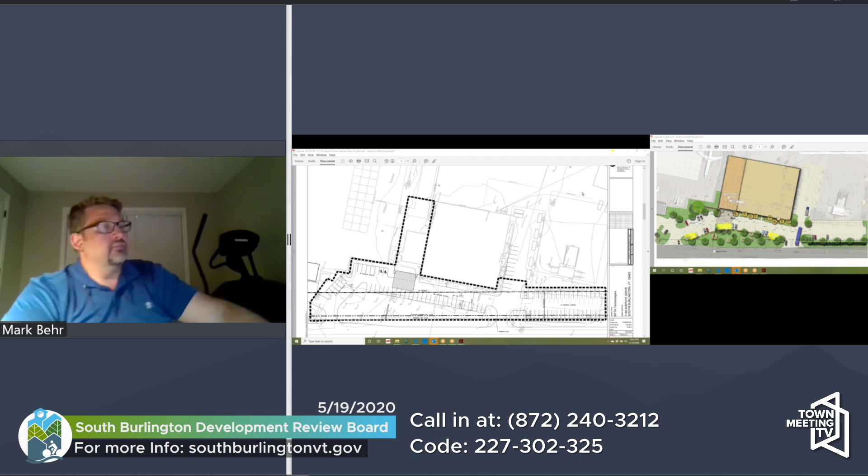Okay, understood. Okay, Jim, Melissa, Don? Makes sense to me, Mark and Matt.

Any other comments? Okay, this is sketch plan, so we're not taking a formal vote on it, but does the applicant have any other questions from the board regarding going forward with preliminary plat? Yeah, Matt, this is Kyle, apologies for my naivete, but if we come forward for the hearing that results in a vote and present something like what's on the right, can we get an indication if that will be accepted or not?

I will tell you I'm not a big fan of continuing to remove the spots once we know this is the right form to take, it's a balance we attempted to achieve. There's a point where removing spots makes the system not work as a whole. So I'm curious if we come back and present the plan to the right, whether it will or won't be accepted, and if it's acceptable for me to ask that question, so we can walk into this next step efficiently and educated.

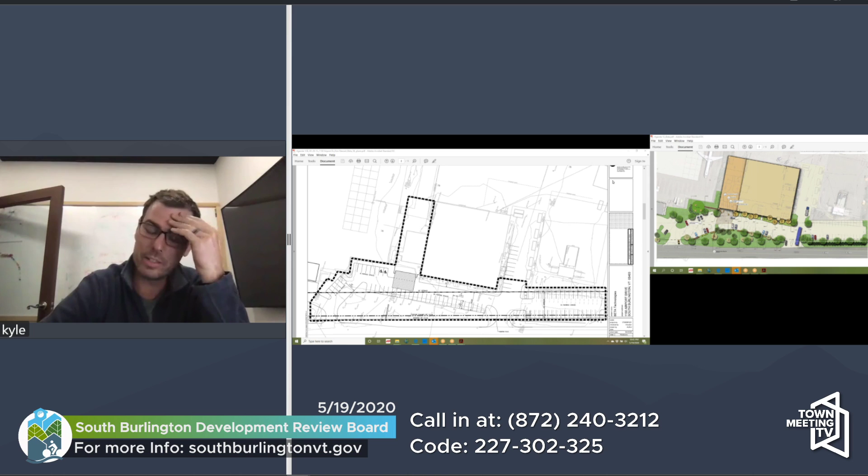Yeah, no, that's an important question and the right question to ask. This is where we don't create a formal hearing, we're not asking you to swear in. You're here to get a sense of our understanding of the project and our recommendation before you come forward. I think what I'm hearing is that we understand the reasons for doing it the way you described. While I can't speak for the other board members, and I can't hold a vote on this because it's sketch, I think you're hearing from a majority of those on the board that they support this plan.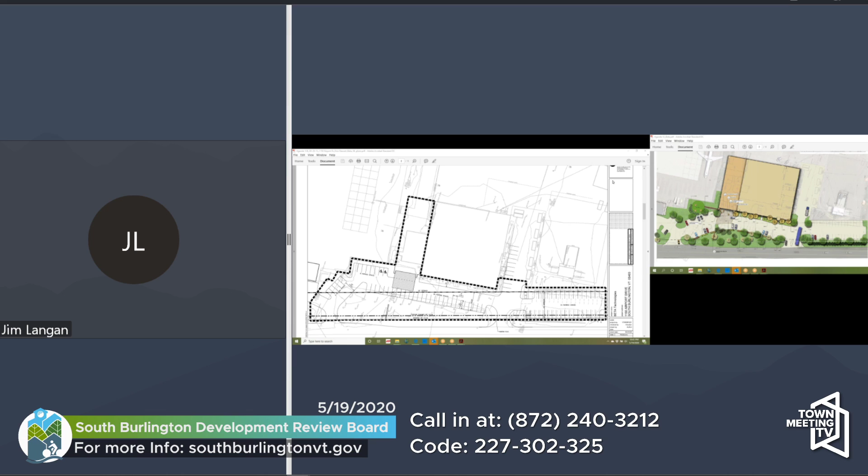Matt, this is Jim. I'll just chime in that I would agree with John and Brian's comments from earlier, just to give another voice to that. So what you're hearing, Kyle, is that you've got a development review board that wants to make this work, and we'd encourage you to come back to preliminary plat with this plan. All right, thanks a bunch.

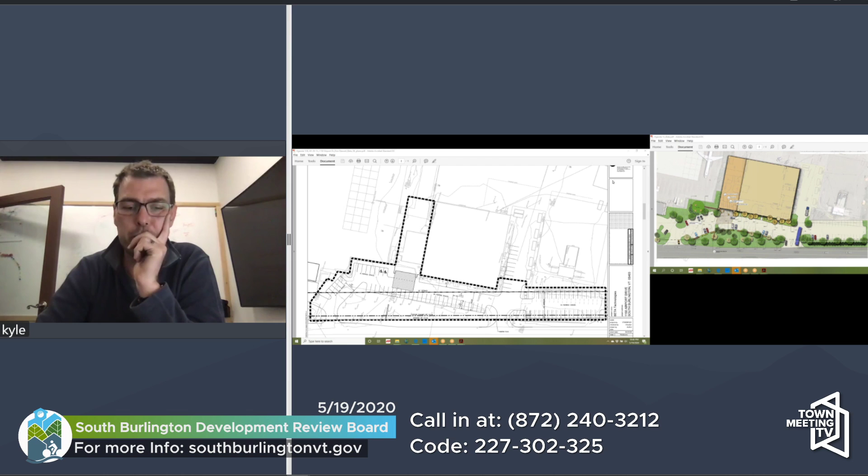I have no other questions. Is there anyone in the public that would like to comment on SD 2015? If so, either signify in the chat box or say your name. Okay, seeing none, then I hope to see you all, Don and Kyle and Chris and others at preliminary plat. We're very excited to do that. Thank you very much, thanks for the time, thanks for sticking around so late.

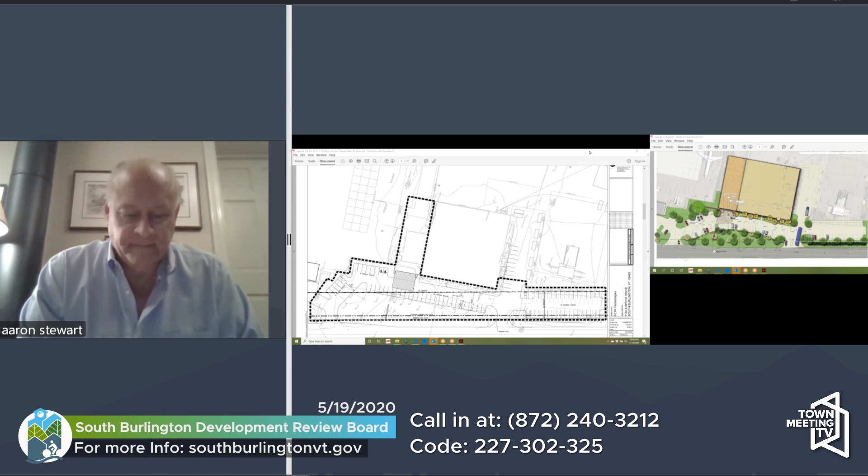Okay, so now we go to agenda item number 13, which is the minutes from April 28th and May 5th. Has everyone had a chance to read the minutes from those two DRB hearings? I'm assuming that's a yes. So I would take a motion that we approve the minutes from April 28th and May 5th, 2020. Is there a second? Seconded by John. We'll do this by voice vote. All in favor, say aye. Aye. Aye. Any opposed?

Okay, moving on to 14, other business. I don't know if anyone has any other business. One question I had for Marla or Delilah: we had numerous questions in the chat box. Are those recorded or put into the public record, or do they just exist as a recorded log? In other words, if someone put something in the chat box on Zoom or GoToMeeting, would it be implied that would be entered into the public record that could be answered by staff or by the board at a later date? I'm thinking specifically about some of the comments or questions asked in the chat box related to one of the earlier projects.